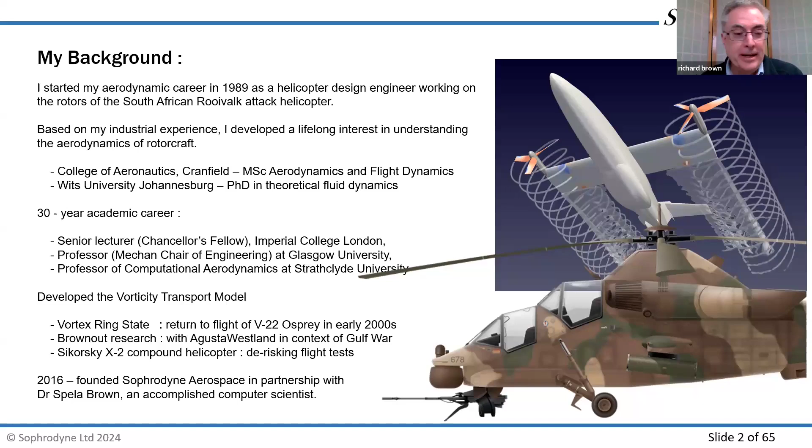Now let's just get down to the basics and get a few definitions under our belt before we get any more complicated. We know that helicopters, tilt rotors, and many other eVTOL aircraft rely on a set of propulsors to generate lift during their descent and landing. That lift is generated by accelerating air downwards through the propulsors. So that pattern of downwards moving air below the vehicle is what we call the downwash field.

And then when that flow hits the ground and turns outwards and is deflected radially out across the ground, we call that field the outwash field. So it's important to get this distinction between downwash and outwash.

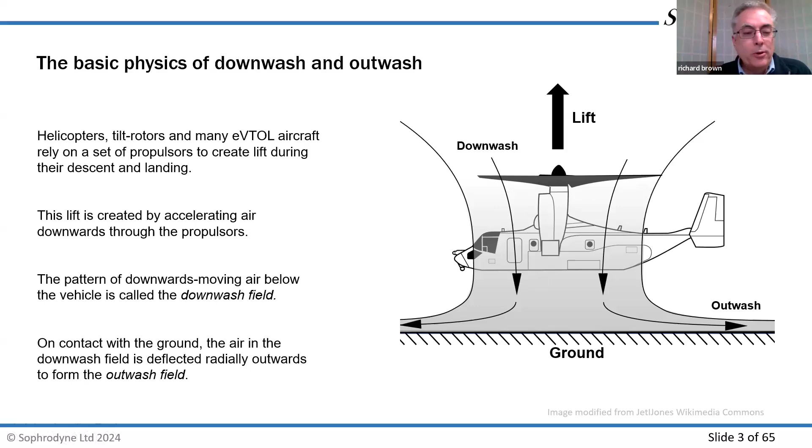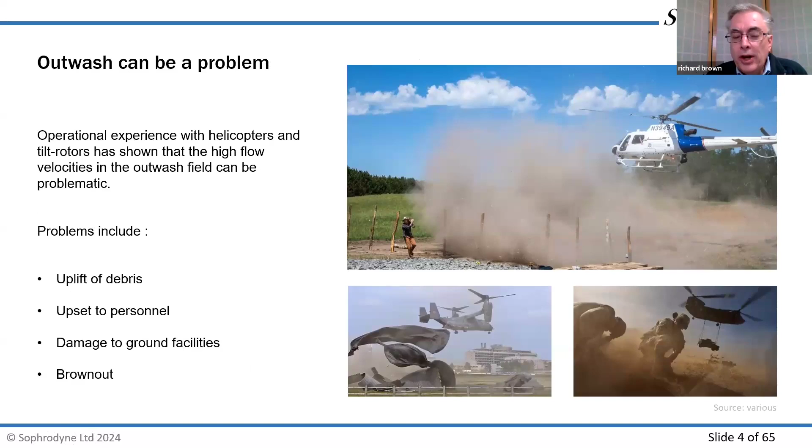Now, we know from our helicopter experience that outwash can be a problem. Various operational problems include uplift of debris, upset to personnel, damage to ground facilities. The root cause of brownout, if you like, is downwash and outwash. And so we're familiar with some of these problems within the helicopter community already.

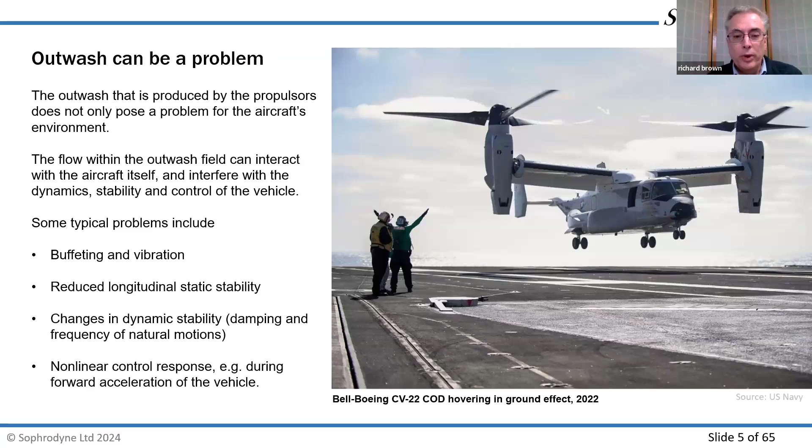We also know that the environment is not necessarily the only part of the system that's afflicted by outwash issues. The aircraft can be influenced by the outwash characteristics of the system as well. So we know there are typical problems such as buffeting and vibration, reduced longitudinal static stability, changes in dynamic stability, all sorts of things like nonlinear control responses, for example, during accelerating the aircraft into forward flight, that are caused on the aircraft by its interaction with the ground and by implication with the outwash field that the aircraft creates.

Okay, so some of the background work to this was work that I did on the vortex ring state in the context of vertiport design. And I'll return to the whole issue of vertiport design later. As you might imagine, the outwash issue is particularly pertinent when we get to that particular frame of reference.

And the work that I presented at the EASA Rotorcraft and VTOL Symposium, which you can find online, was called 'Are eVTOL Aircraft Inherently More Susceptible to the Vortex Ring State Than Conventional Helicopters?' And that's very much what I talked about last time I was invited to talk to the council here.

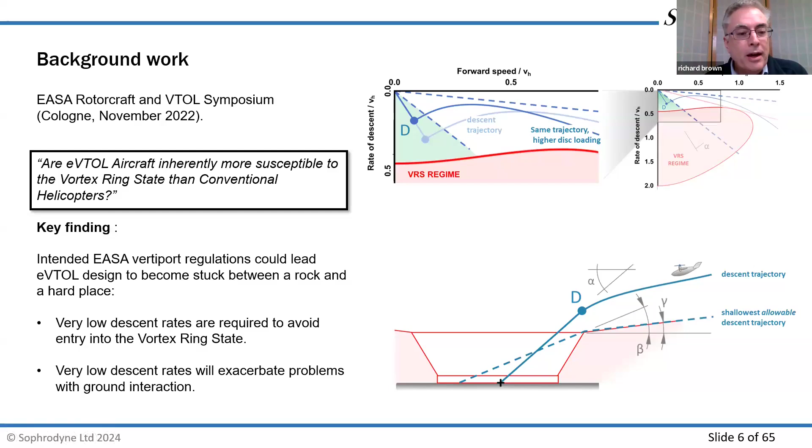Okay, so that led to essentially the focus on the ground interaction, perhaps as an ancillary issue to do with vertiport operations. And I'll talk a bit about that today. So I'll look at the basic physics, I'll look at some of the background to the work that we did, I'll describe in some detail the new study that we performed, and then I'll talk about perhaps the most interesting part, the practical consequences of the findings that we managed to come up with.

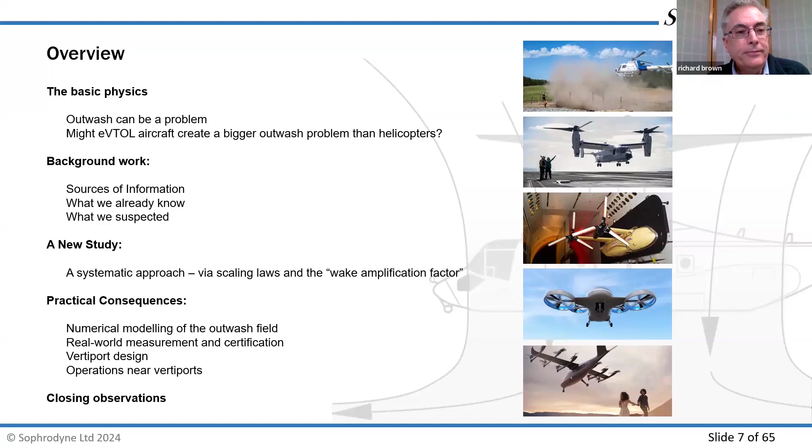So the problem can perhaps be encapsulated in the sense that we know outwash is a problem with helicopters, but might eVTOL aircraft create a bigger outwash problem than helicopters? And we know that the main factor influencing the strength of the downwash field is the disk loading of the propulsors.

Now, this diagram, I think many of you have probably seen before. I presented it earlier, which shows how the downwash velocity is related to the weight of the particular aircraft. And what it does is it tries to contrast the properties of conventional helicopters, shown in blue, with some of the more representative members of the helicopter class shown in yellow, with the characteristics of the eVTOL aircraft for which I could find data. And generally, it's clearly apparent that most current eVTOL aircraft have higher disk loadings than conventional helicopters with the same weight. In other words, the downwash velocities they produce will be expected to be higher than those produced by similar sized helicopters with similar weight.

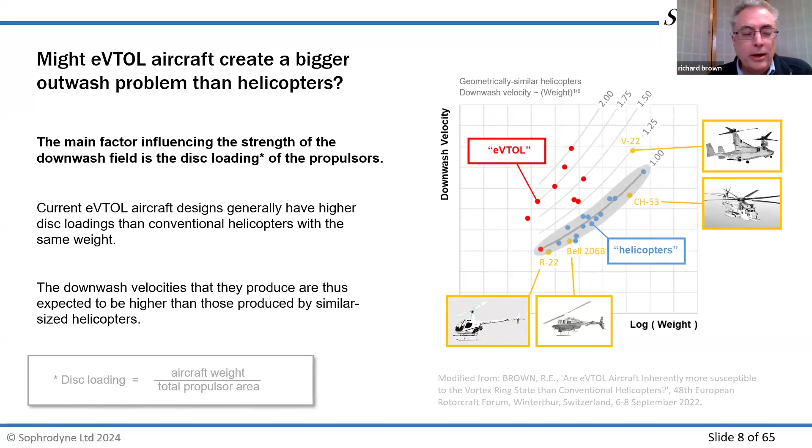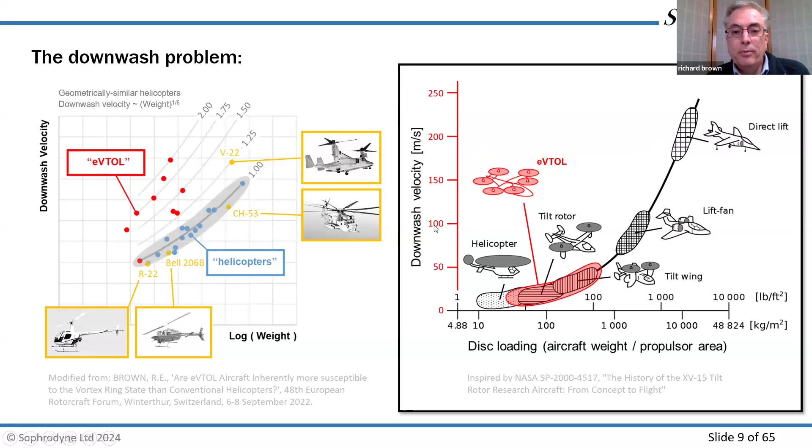So tilt rotors live at the high end of the eVTOL spectrum, and then we have all these jet lift type vehicles or directed thrust vehicles over at the top here. Many of them not in service anymore, but of course they were de rigueur during the 1970s and 80s.

Now, when it comes to the outwash problem, we need to be a little bit more careful, in that the size of the aircraft is critically important. You can imagine two different aircraft that are geometrically similar and are operating under geometrically similar flight conditions. So, for example, at the same ratio of the height above the ground to their characteristic dimension, if they have the same disk loading, those vehicles will have the same downwash velocity. But we wouldn't expect their outwash characteristics at the same distance away from the system to be the same. So in other words, there is a scaling issue here. There's an idea that the size of the aircraft actually makes a difference. So don't be too naive in terms of this idea that a high disk loading is inherently the only factor that controls the strength of the outwash.

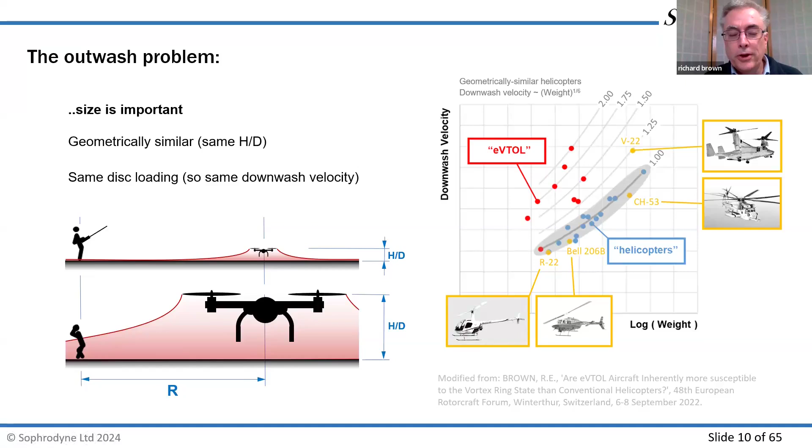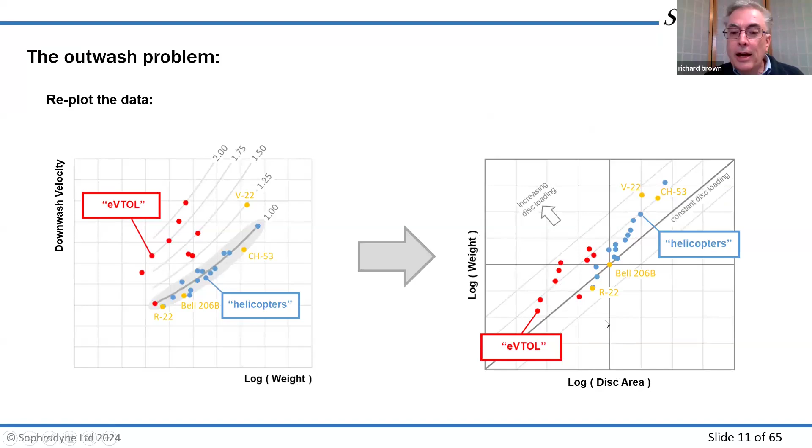And in fact, the best thing to do is to take this diagram on the left here with the downwash velocity expressed in terms of the weight of the aircraft, and to re-express all that information on a slightly more complex graph where we have disk area on the horizontal axis, weight on the vertical axis, and lines of constant downwash velocity are actually diagonal across that diagram if plotted on a log scale. And then we can see that diagram evolve into a slightly more interesting state, in that we can perhaps partition the eVTOL aircraft into separate classes. These guys down here in Group A are very small and very light, and so they are probably not a risk as far as their outwash is concerned. These guys are heavy and small, and hence we don't really know how they're going to behave.

We need to do further investigation. But perhaps the aircraft that are of most concern are these that are up here, which are roughly as heavy as conventional small helicopters, or even fairly large helicopters sitting here above the Bell 206B.

But they're a risk in terms of both their weight and their size as a result. So whichever aircraft you happen to be flying, it might fit into one of those classes there, and we need to be a little bit careful about which one we're actually considering.

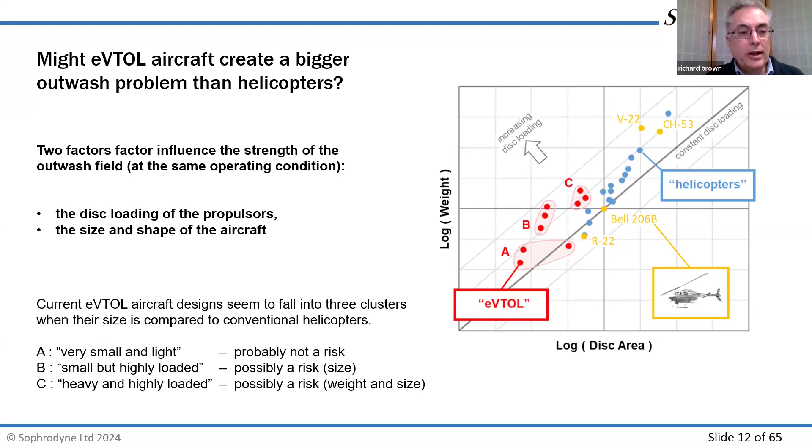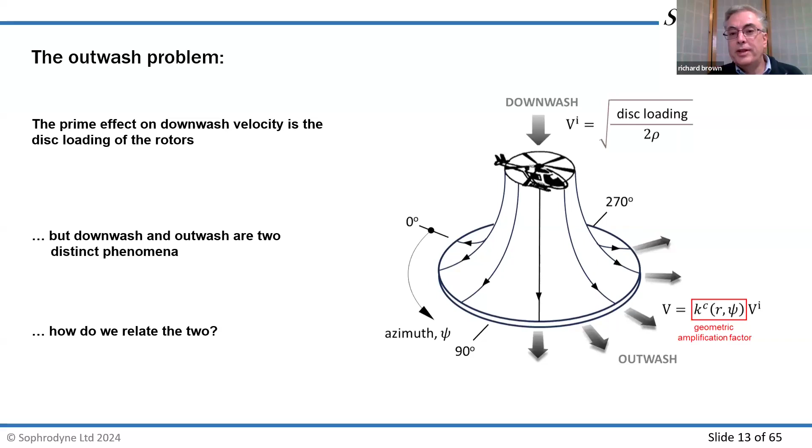Now, given that downwash and outwash are two distinct phenomena, how do we actually relate the two? This diagram tries to encapsulate this. We have the downwash, which comes through the rotors, hits the ground, spreads out and turns into an outwash. But how do we actually relate the downwash to the outwash, and hence the outwash to the disk loading of the system? I'll talk about that in detail in the next few slides.

A lot of the information that I'm going to present from here on is encapsulated in this new study, which was completed under UK Civil Aviation Authority and is now published and available on the web as CAP 2576. This study was really intended as a first step towards understanding the issues more broadly. I think that's worth keeping in mind. It was a stab in the dark, if you like, an attempt to add some more information into the mix, but certainly it wasn't seen as the last word on the subject.

It was really there to try to engender a bit of discussion and a bit of a to and fro as to how important this issue really would be for eVTOL aircraft as we currently understand them. What the study does is it integrates existing knowledge into a consistent framework that we hope can help predict and explain the effects of outwash and downwash that might be associated with current and future eVTOL designs.

And then we try and take that knowledge and extend it a little bit by producing new numerical data, which reveals the salient flow physics. And then what we do is we try to extend our understanding by applying this new knowledge to a range of eVTOL-like configurations. You'll see just how generic these particular configurations are in a minute.

The intent was not to reproduce a Joby or a Vertical or a Volocopter. It was really to be as generic as we possibly could, and as careful in comparing these different configurations as we possibly could be, so that we'd end up with some sort of basic physical and scientific understanding, which we could extend more broadly across the range of eVTOL aircraft.

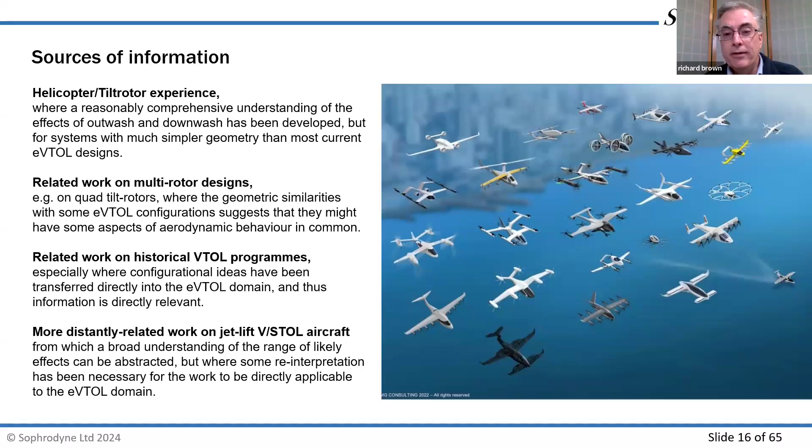Sources of information - well, it's amazing how much information is actually out there. There's helicopter and tilt rotor experience. There's related work on multi-rotor designs. There's historical VTOL programs where the information can be almost ported directly into the new eVTOL domain. And then there's a whole load of information done in the context of jet lift, largely by NASA in the 1950s, 1960s, and 1970s in support of various programs, which is readily accessible.

Now, what do we already know? It's perhaps worth actually thinking about that. The whole industry of outwash and downwash is dominated by a very influential FAA Department of Transport study that dates from the early 1990s. The work originated with that of Ferguson, but then Preston and co-workers extended that.

And what they basically did is they thought of the downwash as this flow through the rotor, which would then turn into a jet-like flow, a thin jet-like flow out across the ground. This idea has very much informed how people tend to think about the outwash field in current circumstances. So the flow has this jet-like nature, on top of which perhaps there are certain perturbations, and that's essentially it - it's a very orderly picture of what actually goes on within the flow.

And as the flow moves out across the ground plane, it effectively decreases in intensity. The velocities get smaller and smaller, and perhaps the fluctuations on top of that mean flow get smaller and smaller as well. And eventually the flow dissipates into the far field.

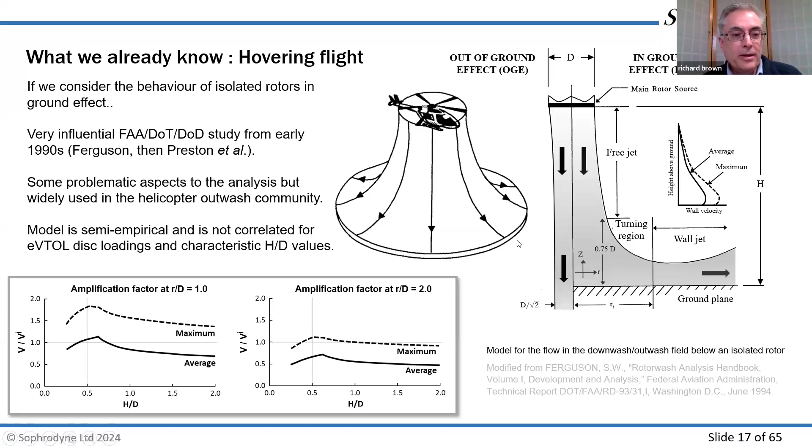This is an issue that the helicopter world has had to contend with to some extent. For example, if you're a CH-47 pilot, you'll know about jet-like flows outwards along the periphery of the outwash field, but it's not something that's particularly well within the lexicon of standard helicopter type analysis.

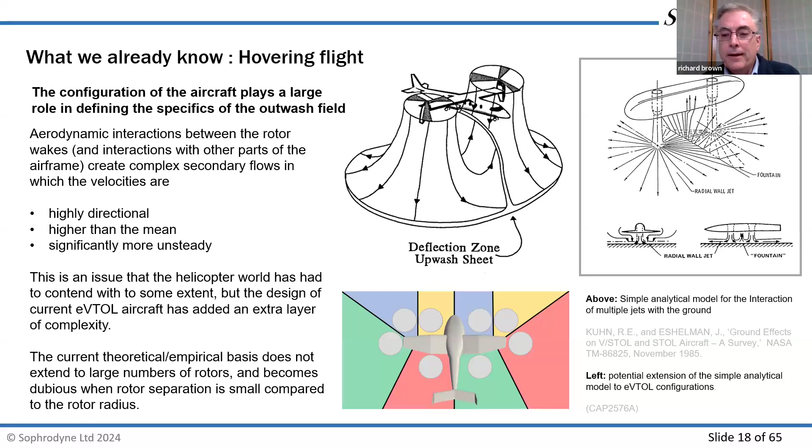Okay, so we want to extend beyond this level of understanding. And what we expected is that if we ended up with multi-rotor configurations typical of eVTOL aircraft, you might end up with very non-uniform flow fields of very high magnitude along certain parts of the azimuth with respect to the vehicle, if you have a multi-rotor configuration operating at low altitude above the ground.

That was effectively the position that was taken. And the way that we would encapsulate that particular variation is we would say, okay, that's the velocity out across the ground, that's the induced flow through the rotor, and perhaps you'd have to define this function, which we'd call an amplification factor, which is a function both of radius and azimuthal position around the vehicle.

And these two examples here, this is a quad rotor compared to a conventional helicopter. Here you can see there's not much variation of the velocity around the azimuth, but here you can see that there are very certainly certain directions along which the outflow is concentrated.

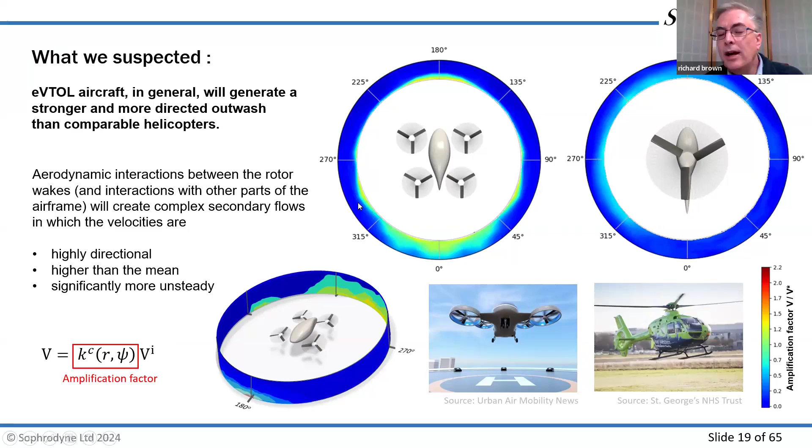Okay, if we went to forward flight, then we know that things get really, really interesting. The structure of the outwash field produced by a single rotor helicopter depends, of course, on the height above the ground at which the aircraft happens to be flying, but also its airspeed and the strength of prevailing winds, with this very interesting physics that the flow can actually change modes depending on the speed at which you're traversing with respect to the air.

And so in transition to forward flight, you might encounter the flow changing geometrically through a variety of patterns. The one of most interest to us is this highly recirculatory flow regime, which develops into this idea of a ground vortex as you pick up speed across the ground. So this idea of several modes.

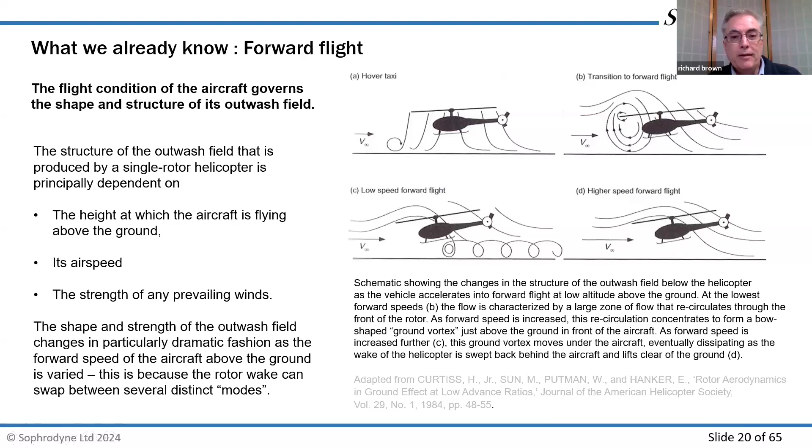And the modes you can actually encapsulate in a diagram like this, which I call the Curtiss diagram in honor of Howard Curtiss, who first came up with it, where essentially as a function of forward speed on the horizontal axis and rotor height, you'd be able to pick up the flow in these various flow modes.

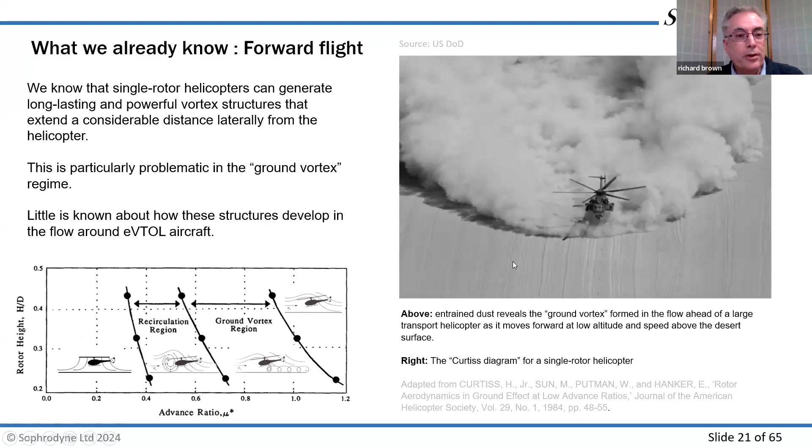And here's quite a beautiful picture of a CH-53 flying at low altitude across the desert. You can see this beautiful bow-shaped ground vortex existing in the flow just upwind of the vehicle in those conditions. Now, what happens when you take this helicopter type information and transplant it into the multi-rotor field?

Well, what we expected and what we found is that eVTOL aircraft with their multiple rotors in general have a much larger footprint on the ground than comparable helicopters. And this is again a consequence of the aerodynamic interactions between the rotor wakes.

So in this quad-rotor vehicle here, you can see these almost like twin bow vortices, which interact to create a very broad structure upwind of the aircraft as it moves along the ground. And another interesting thing here is, of course, the amount of turbulent structures that tend to interfere with the tail structures, the empennage of that particular aircraft. I'll perhaps get around to talking about that in a little bit more detail.

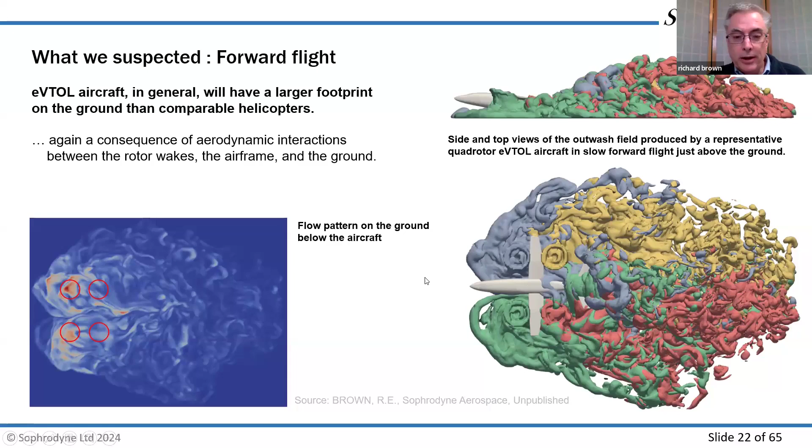Okay, so how much stronger will the outwash in fact be compared to a helicopter with the same weight? Well, this is the kind of analysis that we would do. We would take the helicopter outwash velocity, amplify that by a disk loading effect, so just accommodate the difference in disk loading between your typical helicopter and your eVTOL aircraft, and then try to analyze this configurational effect, which comes into play because of the eVTOL aircraft having multiple rotors juxtaposed in a particular arrangement around the aircraft.

And if you could come up with these two correction terms, then perhaps you could relate the velocities in the outwash created by an eVTOL aircraft to the velocities created by a helicopter under the same circumstances.

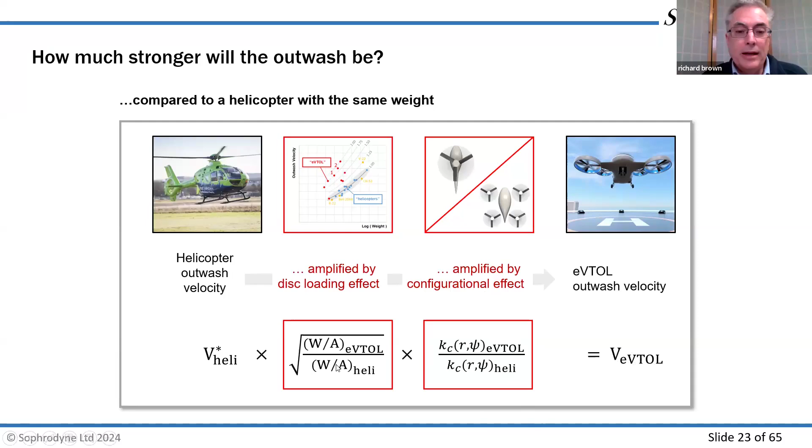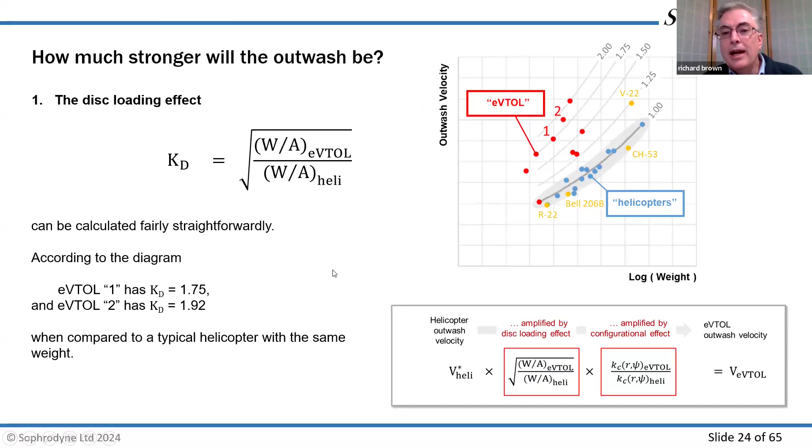The disk loading effect is pretty straightforward. All you do is divide the disk loading given by one aircraft configuration by that given by another. Typical values would be between 1 and 2 for comparing classic eVTOL aircraft to normal helicopters. This configurational parameter is the more difficult one to determine, and that's where the study actually focused itself.

When you try to compare two aircraft with different configurations, you need to be really careful that you're comparing apples with apples. So we need a design taxonomy that actually makes sense from an aerodynamic point of view. We need to enforce a whole bunch of scaling laws to make sure that when we're comparing the characteristics of the eVTOL aircraft to a helicopter, we're not comparing apples with pears.

So what we did throughout the studies is devise a set of configurations, a taxonomy if you like, or a hierarchy of vehicles, where one would be a permutation of the next, but in a very systematic way. In devising these permutations, we made sure that certain parameters were kept constant throughout.

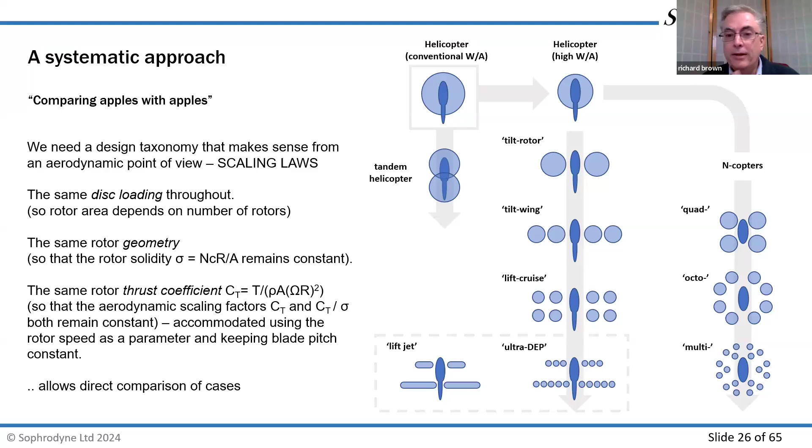Most importantly, the disk loading. In other words, the individual rotor area depends on the number of rotors. We would keep the rotor geometry the same so that the rotor solidity would remain the same, and we would keep all the rotors operating at the same thrust coefficient. If we keep these three parameters constant, then we can be sure that we can compare cases with each other.

We can do various parametric changes. For example, we can explore the effect of changing the rotor geometry. We can go from, let's say, a basic lift cruise configuration, and we can break the symmetries by moving the rotors outwards, as in the second example, or we can do even more damage to the symmetry of the system by moving various rotors about, as suggested in the diagram at the bottom.

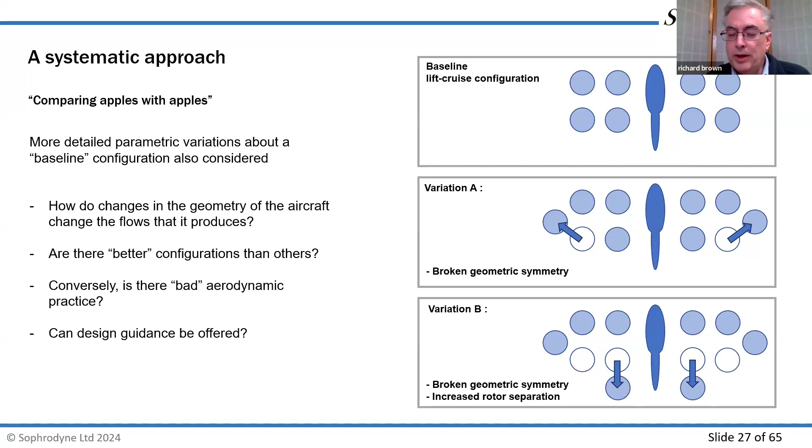The idea there was, can we actually pick up the effect of these changes of geometry in the pattern of outwash on the ground? Are there better configurations than others, for example, that produce less outwash? Is there bad aerodynamic practice? Is putting rotors in certain positions on the aircraft not such a great idea compared to other potential configurations that might be adopted? And can we actually offer design guidance eventually to the designers of these sorts of vehicles?

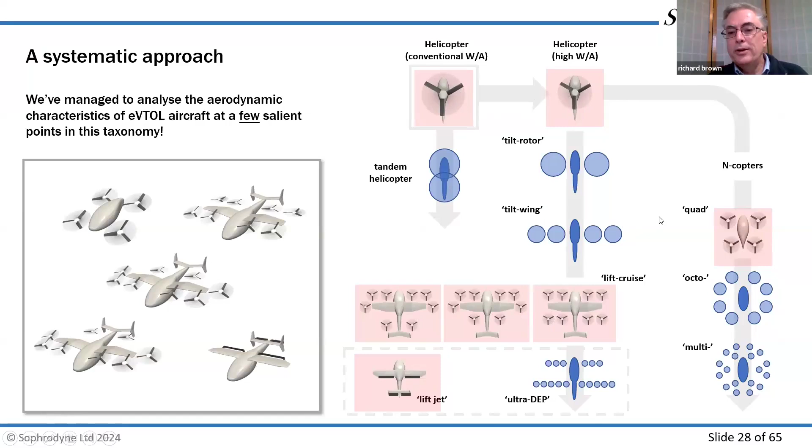So we managed to get through, in the course of the project, a few configurations, but certainly not a comprehensive range of them. We analyzed a few conventional helicopters, this one with a conventional disk loading, this one with a slightly unrealistic disk loading that's more representative of eVTOL aircraft. We looked at a range of lift cruise designs, a lift jet design, and also a more conventional quad rotor design in trying to compare the various characteristics of these vehicles.

Now, how we did this is we went through the whole process using high resolution numerical models. So the basis of the results I'm going to show you here is essentially numeric. What we did is use a very specific numerical tool called the Vorticity Transport method. The difference between that method and other more conventional CFD techniques is it actually preserves the inherent structure of the flow. This turns out to be really important when we're trying to find out what the characteristics of the outwash happen to be.

A typical RANS CFD method would diffuse all this structure and leave you with a very bland outwash field, created across the ground, where you wouldn't actually be encapsulating some of the fundamental physics that we found really drives some of the important salient features of the outwash field.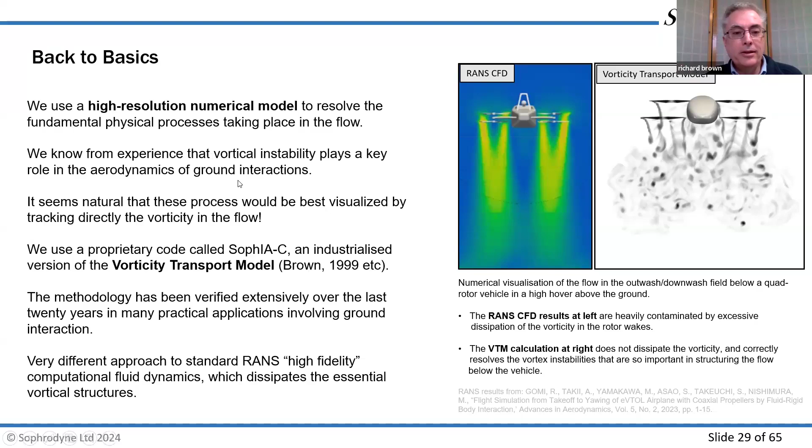So remember that what we're doing here is looking at a very specialized numerical method, which is optimized for the analysis of rotor flows with vortices, where, of course, there are these inherent instabilities that are really important to evolving the flow. So typically, this is what a calculation would look like.

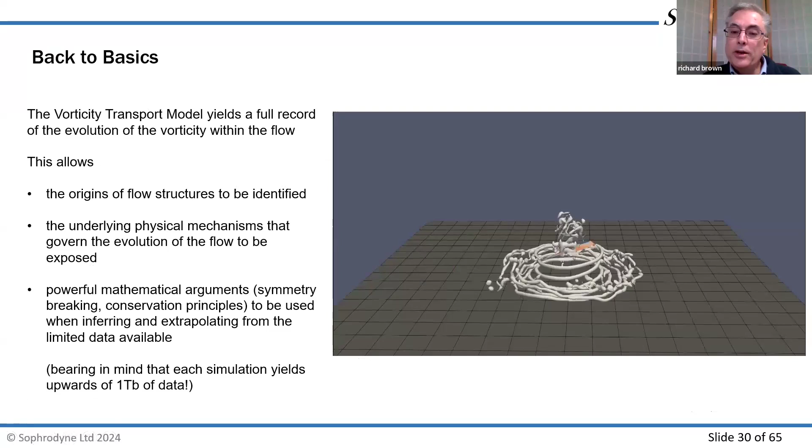That's a very simple calculation of a two-bladed rotor, but you can see that we're actually capturing the tip vortices. We're capturing the interaction of the tip vortices as they roll up and destabilize themselves, and then their interaction with the ground as they spread out across it. You can see how the flow actually starts to develop, but the flow has a finite range of dispersion out across the ground because of these inherent vortical instabilities within the flow.

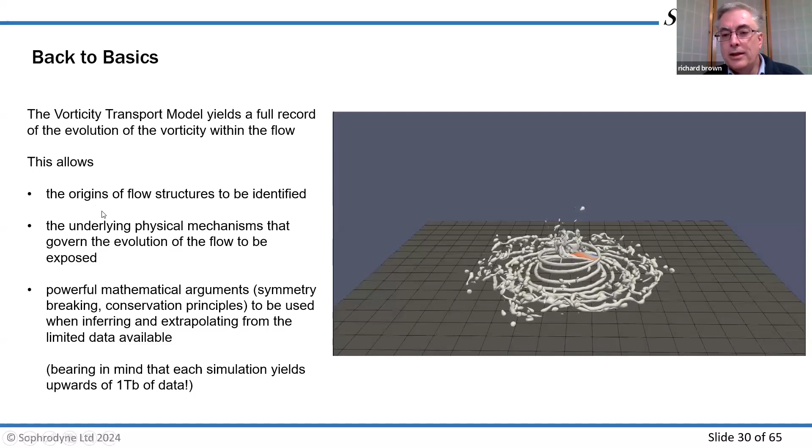Okay, so we can identify the origins of flow structures using this high-powered CFD technique to analyze the flows of these sorts of systems. And that's typically what a developed outwash flow will look like. Here's the rotor, here are the tip vortices. They interact with the ground and start to disperse, break up and destabilize themselves as they move out across the ground, giving some very interesting flow patterns. You can see how different that is from this classical conception of how the outwash flow looks.

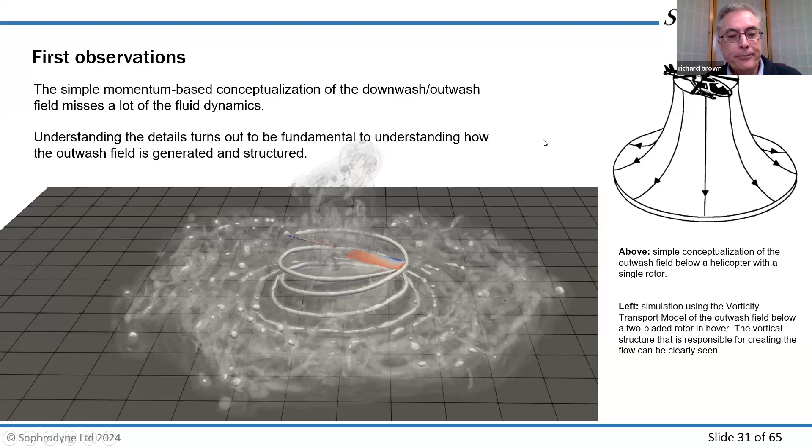So the first thing, of course, is to validate these models by comparing against experimental data. And we managed to do that fairly successfully. This is small-scale information from wind tunnel tests, where you can pick up the positions of the vortices fairly well. This is a comparison against full-scale data for the CH53, and we can actually pick up the variation of outwash velocity with distance above the ground fairly well, in terms of both its magnitude and its character.

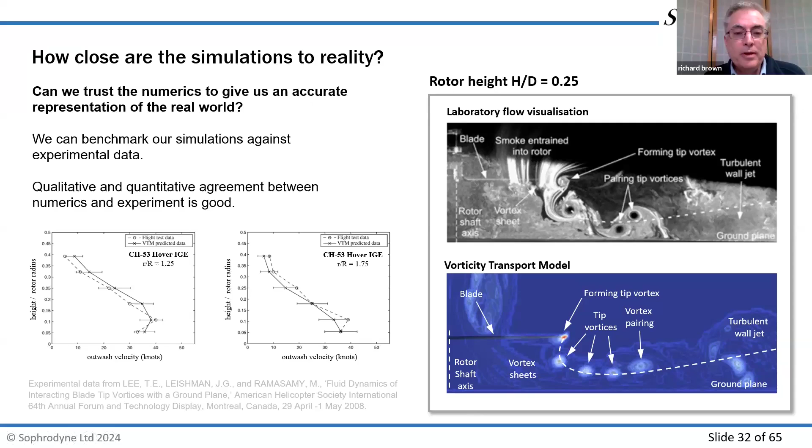Now let's get back to this idea, the simple conceptualization of the flow - that the flow in the wake tube accelerates down below the system. Unfortunately, this is the characterization that is preserved, or supported, by many RANS calculations. So you need to be a little bit careful about what you read in the literature. The flow is not actually like that.

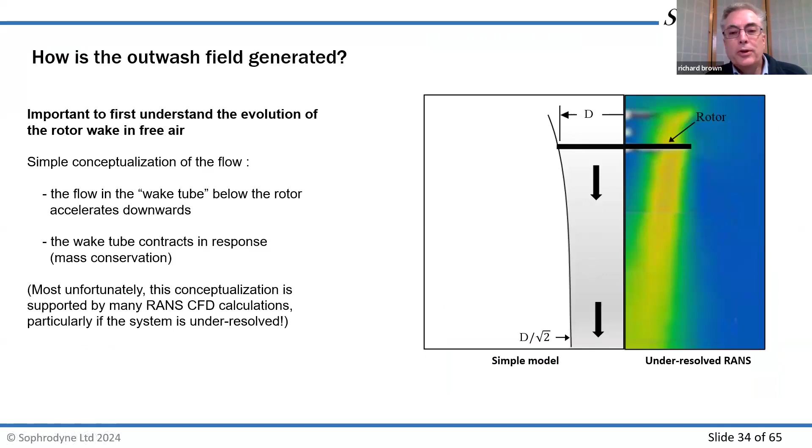We know that the flow is much more granular. It consists of these tip vortices, and these tip vortices eventually destabilize. Then the structure below the rotor wake actually dissipates, turning into this turbulent mush of fragments. That's very, very different to this coherent tube of flow which extends out to infinity below the rotor system.

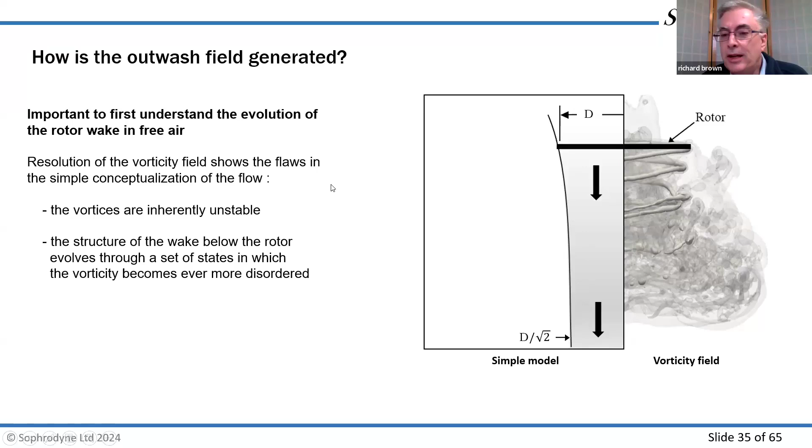The vortices are inherently unstable. What that does is mean that our conceptualization of what the rotor wake does should change in light of this instability. So the wake consists of a portion which is initially coherent. That coherence disappears as the wake is destabilized by these inherent instabilities. The wake eventually ends up in a disordered state, and then decays into a turbulent jet which extends out to some distance below the rotor system.

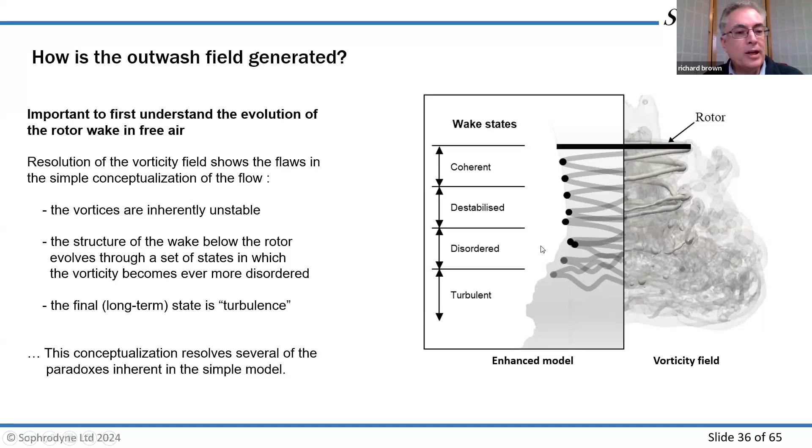This conceptualization actually resolves several of the paradoxes inherent in the simple model for the outwash that folk are perhaps more familiar with. So how's the outwash field generated? Well, all I do is take this particular picture of the helicopter rotor, or the eVTOL rotor, in free flight out of ground effect, and I stick in a ground plane.

Now, the kind of outwash flow I'm going to get, given what I've described in terms of the changing structure with distance below the rotor, changes depending on how high the rotor system is above the ground. So if the height of the rotor system is roughly equal to its diameter or somewhat higher, I'm going to end up with a turbulent outflow across the ground. But if I bring that distance closer, the interaction with the ground becomes ever more structured.

So here, in this case, I have a short distance over which these vortices actually remain coherent - a region where we might call the ground interaction intermittent, before you end up with this turbulent outflow. And if the rotors are really, really close to the ground, then you end up with a highly structured interaction with the ground. I'll show you how that applies to different aircraft in a second.

If you start to stick multiple rotors next to each other, you can imagine again the form of interaction depends on how high those rotors are above the ground. So for a highly mounted pair of rotors, the interaction becomes turbulent, whereas if we bring the rotors way down close to the ground, that interaction becomes far more structured.

And you can end up with really interesting permutations of that. For example, if you've got one rotor which is very close to the ground and one rotor which is really high, then you can end up with these sort of undercutting type features, where the wake from the low rotor manages to tunnel its way under the wake from the high rotor, and you end up with some very, very complex vortical structures, which I'll show you in a second.

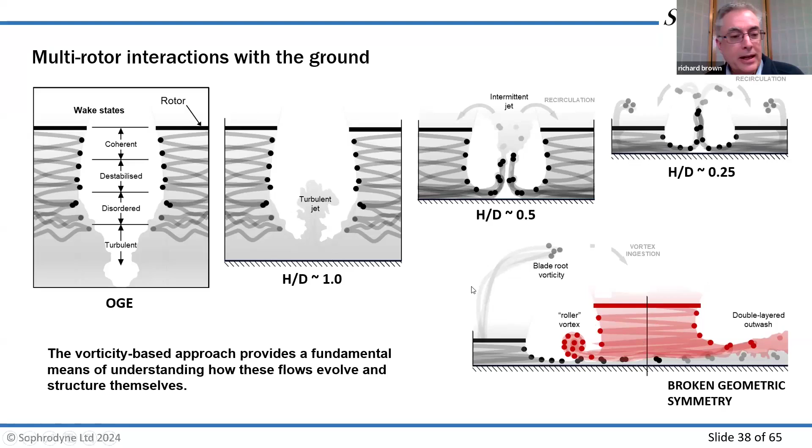Okay, so the aim is eventually to get to design guidance. You can see, for example, how the configuration of the aircraft might actually influence the structure of the outwash field. An aircraft with low, large rotors might end up with a very different outwash pattern to one generated by an aircraft which has higher mounted, smaller rotors when operating at the same height above the ground.

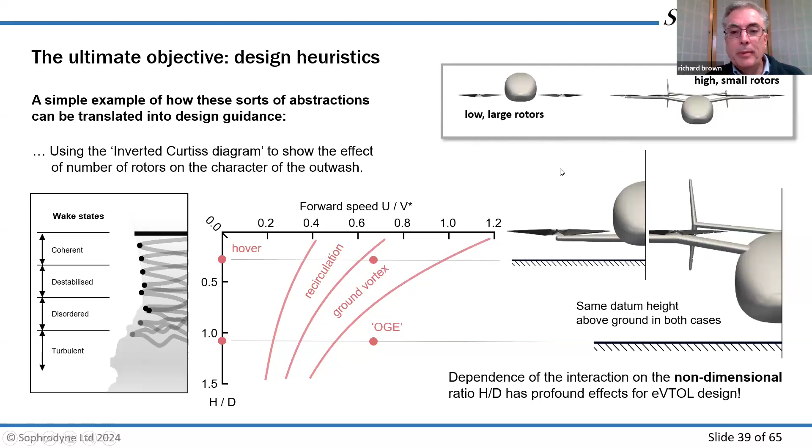Perhaps the best thing to do is to show you some animations of what goes on in that particular case. Using this numerical method, we can do a numerical simulation of the outwash from under an aircraft where we've defined the configuration, and we can then pick up the various salient features to understand just what's going on in the outwash field.

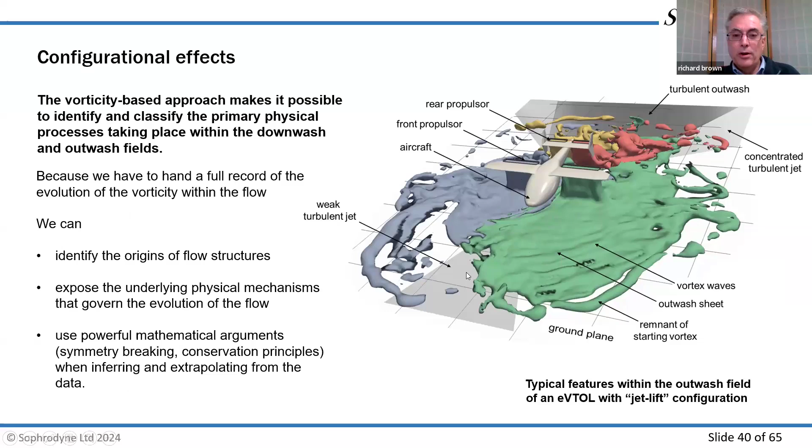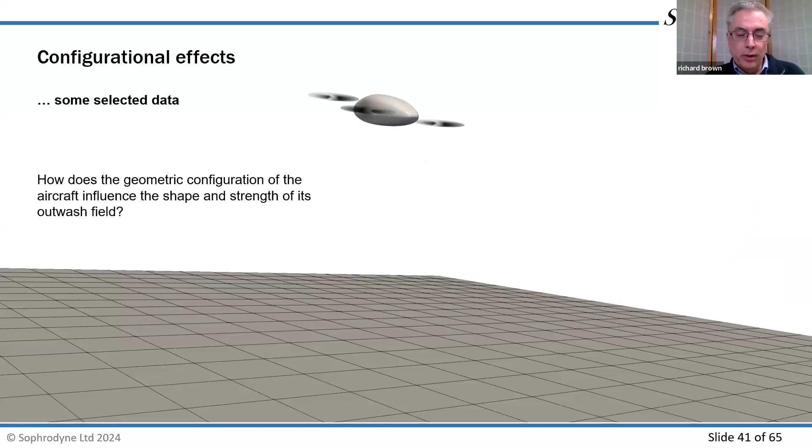Okay, so how does the geometric configuration of the aircraft influence the shape and strength of its outwash field? That's really the question we're trying to answer in establishing the equivalence between helicopters and eVTOL aircraft. So let's have a look at a few particular examples.

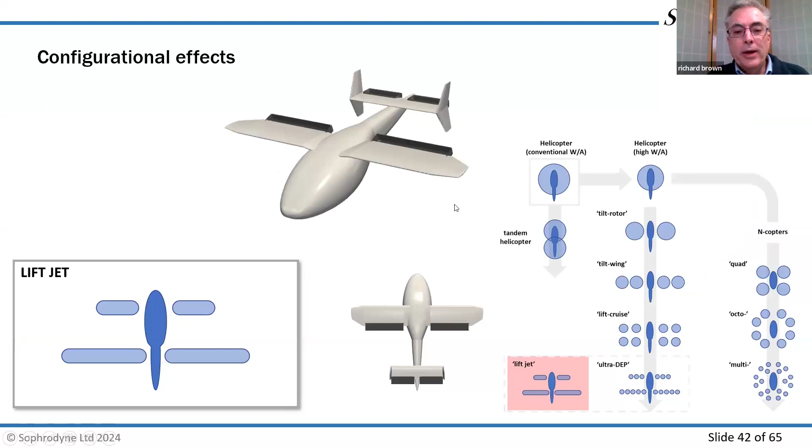This is a jet lift aircraft where we've got these long slot-like effectors mounted around the aircraft. What kind of outwash field it produces is shown in this particular video. You can see the outwash from the various effectors colored in different colors. We're looking at the vorticity field here, and you can see how that vorticity field spreads out across the ground.

The character of the flow in front of the aircraft is very different to that behind. You can see the flow behind the vehicle is highly turbulent and granular, whereas the flow out in front of the vehicle is fairly smooth and sheet-like.

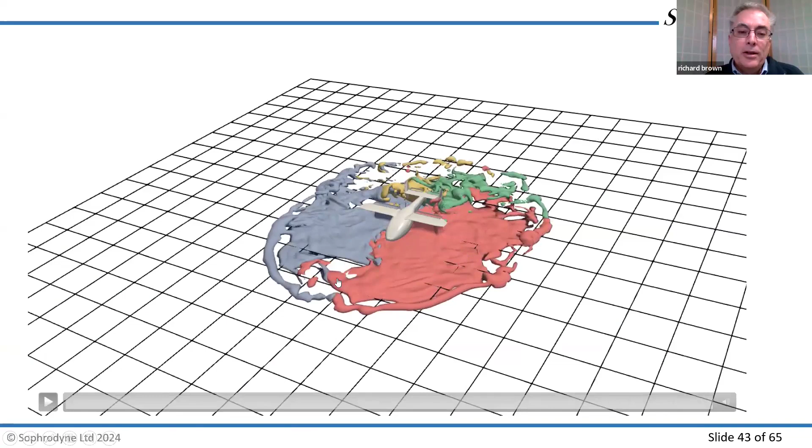Something very interesting is going on along this axis over here. Essentially, what's happening at this interaction is you're ending up with a high-velocity jet-like flow out along the axis of the aircraft. But bear that in mind, and let's change the configuration.

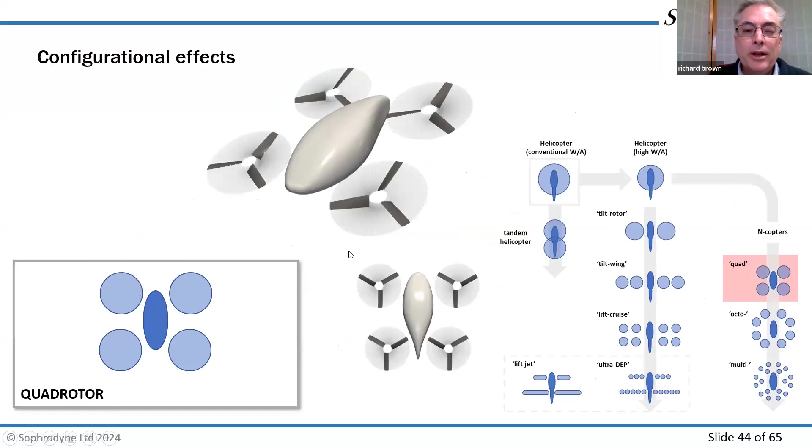Let's go to something that's more akin to a quadcopter and see what kind of outwash that produces. If I run that same video here, you can see we end up with a situation that's really interesting, where there's a lot of interaction between the rotors. These rotors produce flow fields, bits of vorticity, which tend to be sucked into the other rotors.

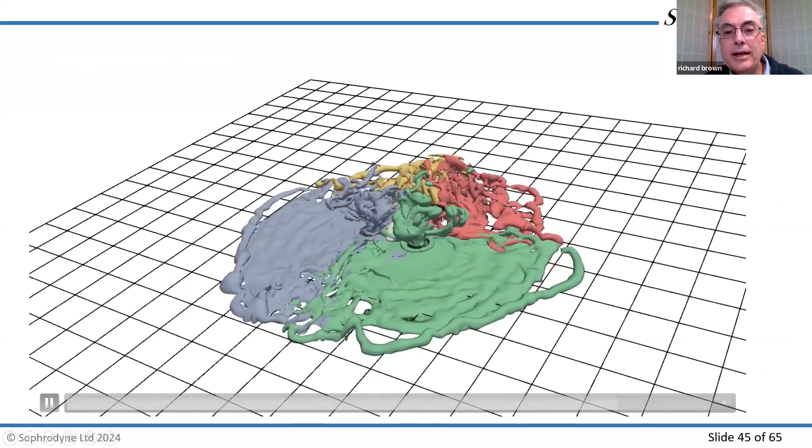You can see again we've got this idea of a sheet-like flow out in front of the system and a much more turbulent flow behind, because in this case these rear rotors were actually mounted higher above the ground than the rotors in the front of the aircraft.

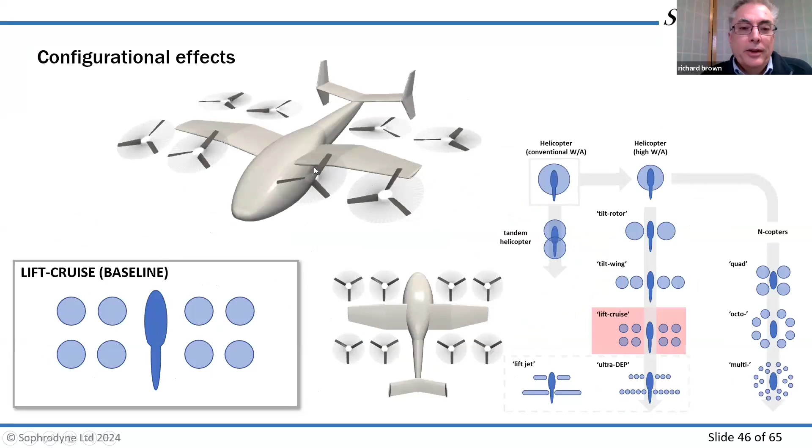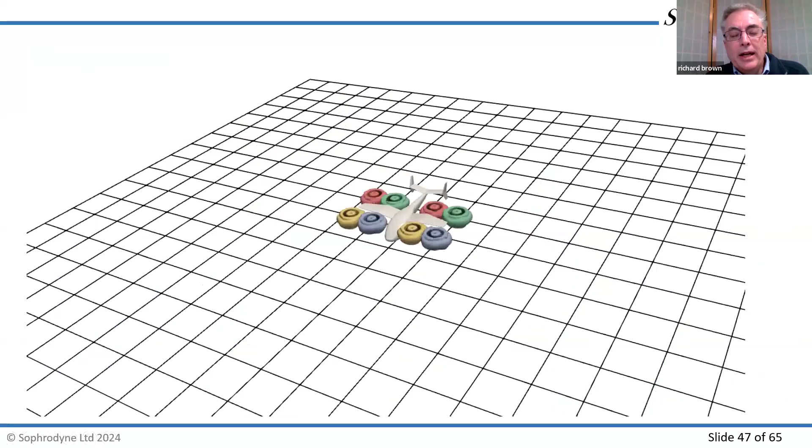If we change to something which is a little bit more representative of conventional, the sort of configuration very characteristic of a lot of the aircraft that we currently see on the design boards, the character of the flow changes completely. Here we have an 8-rotor lift cruise configuration, and if I run its calculation, you can see the aircraft very quickly becomes enveloped in a highly turbulent outwash field, which is largely a result of the rotors being much smaller and mounted higher above the ground.

Okay, so cutting to the chase, how do we take that information? Well, the first thing we can do is try to understand what the physical mechanisms involved actually are. The interesting thing is, because the calculations are unsteady, they run from an initial condition and advance through time for as long as you'd like, so you can actually pick up the evolution of the flow structures in terms of these inherent instabilities within the rotor wake.

Okay, you start to see the effects that you'd expect. If you change the height of the aircraft above the ground, in this case the lift cruise aircraft, you can see for low altitudes above the ground you might end up with a coherent, very sheet-like outwash field. But as you increase the altitude above the ground, that outwash field turns into a much more turbulent interaction with the surface underneath.

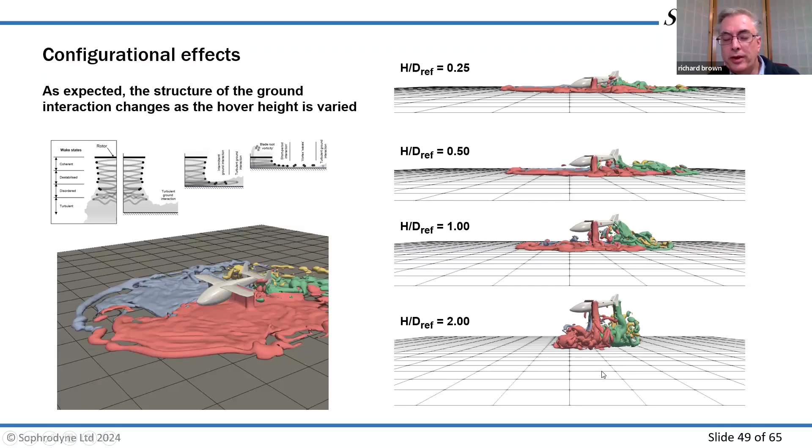Likewise, if you change the forward velocity of the aircraft, you expect to see the Curtiss diagram type effects. In this case, this is the quadcopter, and you can see the aircraft is almost enveloped inside its recirculation zone. As we speed up the aircraft, a ground vortex forms, and as we go ever faster, that ground vortex gets swept into the flow behind the aircraft. This is much more prevalent or easily observable in the case of the lift cruise, where the propulsors are higher above the ground.

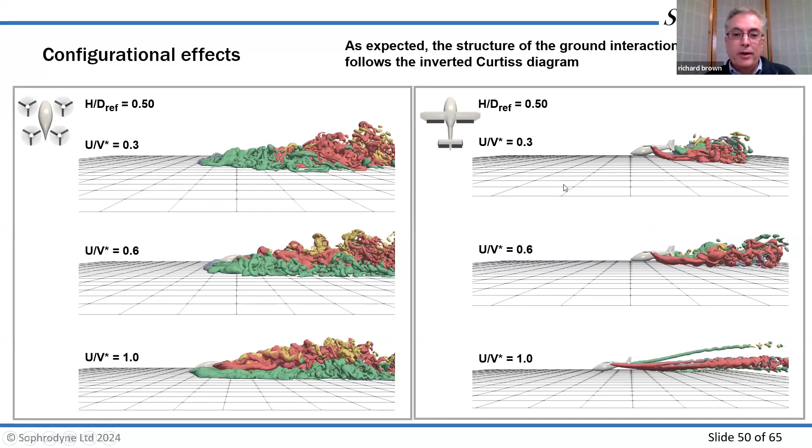This figure is perhaps one of the most important ones that I'll show you, because a lot of the data for the velocity in the outwash field in the current literature is presented as a mean outwash value plus a superimposed perturbation - this idea of an outwards flowing jet of air across the ground. If you have a look at this simulation of what the instantaneous velocity on the ground actually looks like below an aircraft like this, it's very hard to imagine that there is this coherent jet of air across the ground upon which we can superimpose small fluctuations.

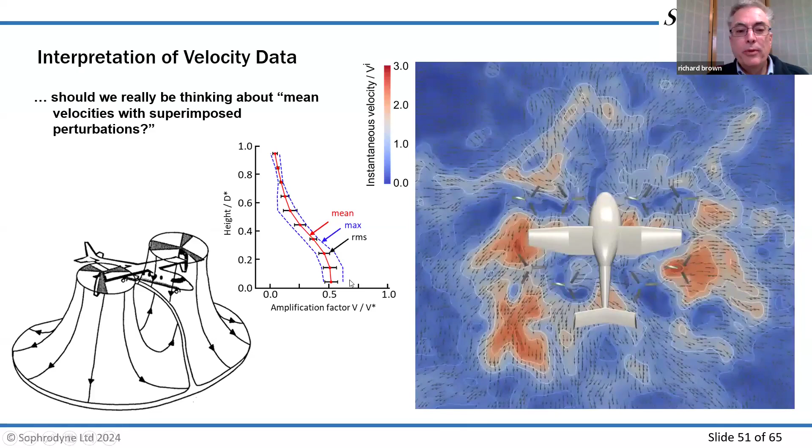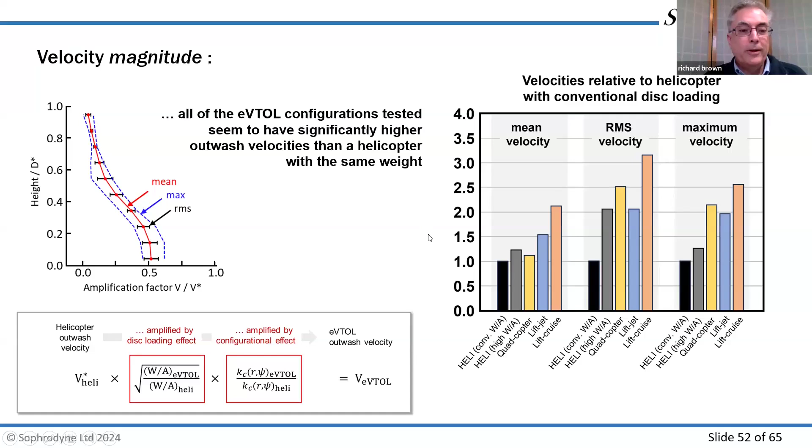Let's have a look in more detail at the structure of the outwash field, and this is where things get really interesting, in that the velocity distribution produced by these various eVTOL configurations is very different. If we look at the mean flow in the outwash, you can see for the quadcopter design, most of the outwash is concentrated in a jet which is actually aligned with the vehicle's fuselage, and that's largely a result of the interaction of the rotors with the fuselage.

If we look at the lift cruise configuration, we tend to find that the mean outwash is more laterally directed as a result of the squeezing of the flow between the fore and aft rotors in this particular case. If we have a look at the RMS velocities, we can see that they are concentrated in these very distinct jet-like structures at particular orientations with respect to the aircraft, and those orientations are generally aligned with the confluence between the individual wakes produced by the rotors.

Now, in my opinion, it's these jet-like structures which are perhaps the most interesting features of the outwash produced by eVTOL aircraft, because those will have the most consequence for operations near vertiports and for passengers and infrastructure that happens to be close by to the vehicle during its operations.

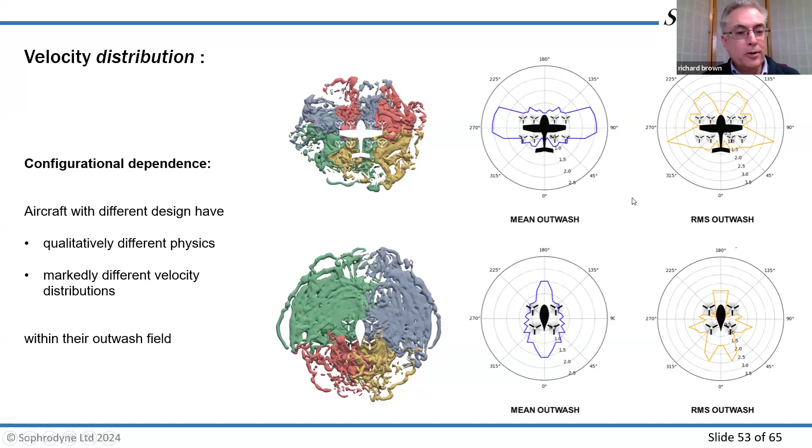The other interesting thing is if we change the configuration ever so slightly, we can make some very big changes to where these jets actually exist and how many of those jets there actually are. So these diagrams compare our very symmetric lift cruise configuration with one where we've moved the rotors around the configuration a little bit to try to optimize some of the aerodynamic interactions. You can see that the jet positions change quite considerably in terms of where they are around the azimuth of the vehicle.

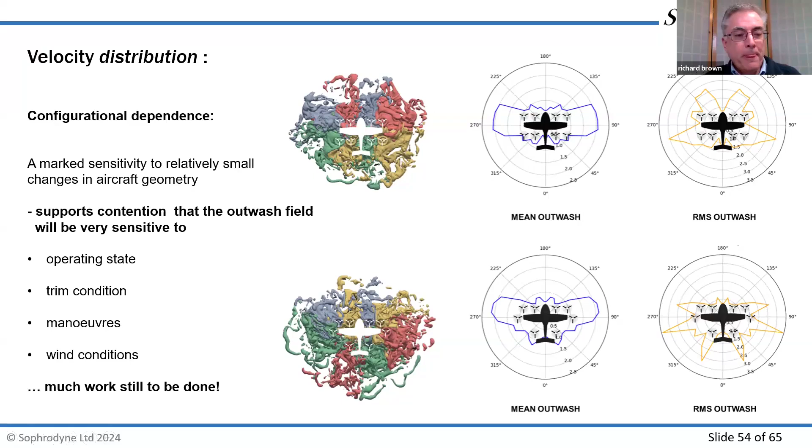Okay, so what does this all mean practically? Let me try and summarize in a few slides as to where this is all going.

What we now know from these simulations, or what we very strongly suspect, is that eVTOL aircraft in general will generate a stronger outwash than comparable helicopters, but also a far more directed outwash in terms of the existence of axes along which the flow will be very strong. Whereas with a conventional helicopter, you expect the outwash to be more or less consistently a certain value, no matter what azimuth you happen to be approaching the aircraft by.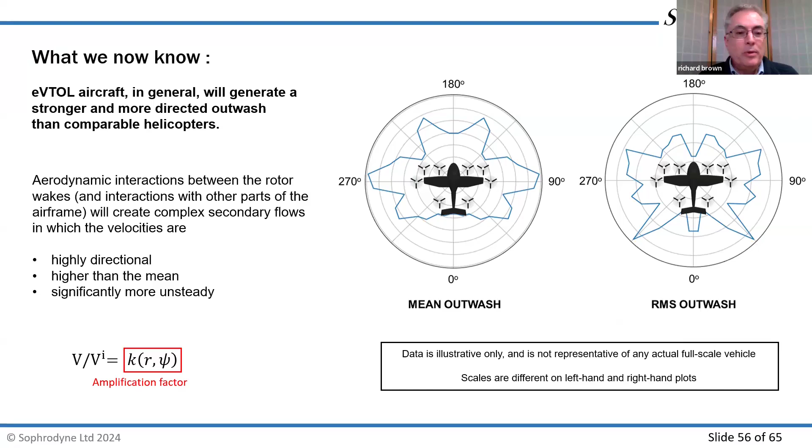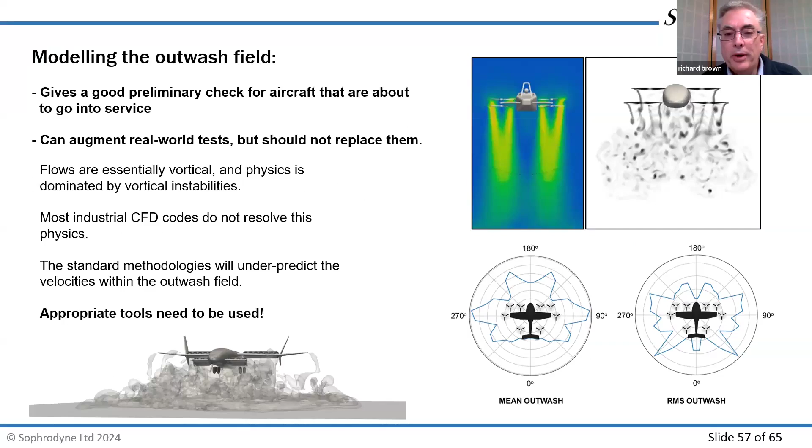So what is that really going to mean? I'll skip over the slide to a large extent. The first thing to point out is that you need to use the right numerical methods to pick up these flow features. If you use a conventional RANS flow, you tend not to pick up these jet-like features, because the basic physical mechanism that produces these jets is the interaction between the vortices on the ground. Most conventional CFD codes don't resolve the flow to that extent to be able to pick up these jets. So using the appropriate tools is perhaps the first recommendation I would make.

When we come to vertiport design, we know that the current way of dimensioning vertiports is in terms of the controlling dimension D of the aircraft, which is just a geometric characterization of the size of the vehicle. The argument here is that it's a good approach to start off with, but if there's aerodynamic interaction involved, then that controlling dimension, based simply on the geometry of the aircraft, is insufficient. It acknowledges aircraft size, but it doesn't acknowledge the aircraft's configuration itself. So it ignores issues of disk loading, and it ignores the directionality of the outwash.

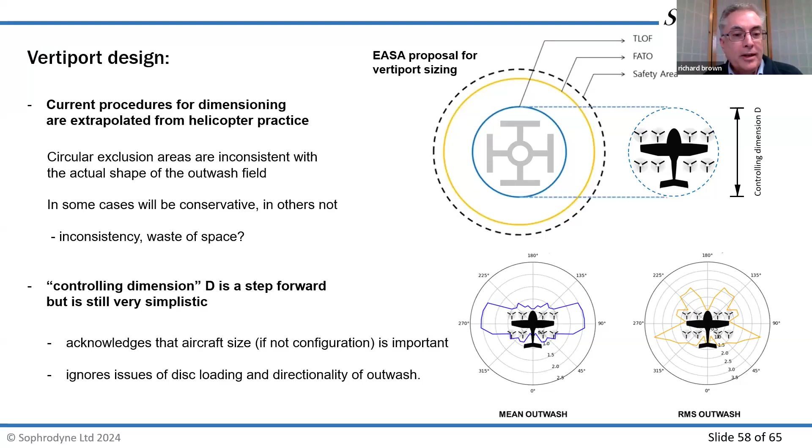If we're going to use these sorts of principles, which are largely developed in the context of protecting the aircraft from its surroundings, there's a tendency within the vertiport design community to extrapolate this kind of analysis and use it to try to determine the zone of influence or the zone of danger posed by aircraft on the surroundings. Then we need to be very careful in using this controlling dimension analysis.

Another thing to realize is that the orientation of these jets is dependent on the orientation of the aircraft. The jets essentially move with the aircraft as it turns and maneuvers on the ground. Hence, this poses quite a few issues once we start to consider issues such as ground handling, taxiing, and passenger access. Air is invisible, so we need to make sure that passengers are not approaching the aircraft along these zones of elevated outwash, or are not being interfered with by another aircraft operating nearby.

And then ground vortex, turbulence, and upset to following aircraft is a whole other can of worms that perhaps I'll deal with in a later bit of research.

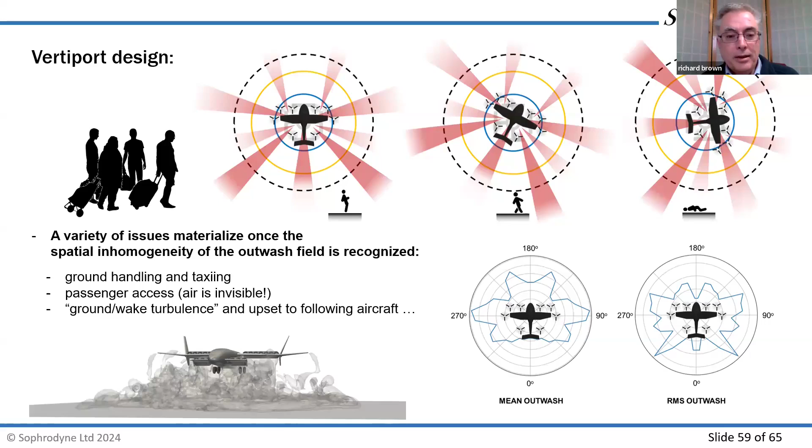Now, I think when we go forward and actually understand the outwash characteristics of these aircraft in proper detail, we'll realize that this fairly ad hoc approach is not particularly well informed and perhaps not appropriate. We need to use the physics to define just where we measure the outwash characteristics of these aircraft. So I think as far as OEMs and regulators are concerned, there's a danger here that we follow the letter but not the spirit of the procedures.

So we take an aircraft, go through the standard procedure, and quantify or qualify the aircraft based on a standard procedure. The salient features of the field are going to be missed if we do something like that, and we'll probably underestimate outwash velocities, particularly if the sampling regime is not dense enough on the ground around the aircraft when we try to quantify the outwash features of the aircraft itself.

One thing we need to take into account is that a lot of our current experience, especially in analyzing the human effect of the outwash field, is based on physiological effects derived in the context of fit, strong individuals. For example, the PAXman model is really based on US Marines, tough, burly guys carrying huge backpacks, and how the outwash created by large military helicopters influences those particular individuals.

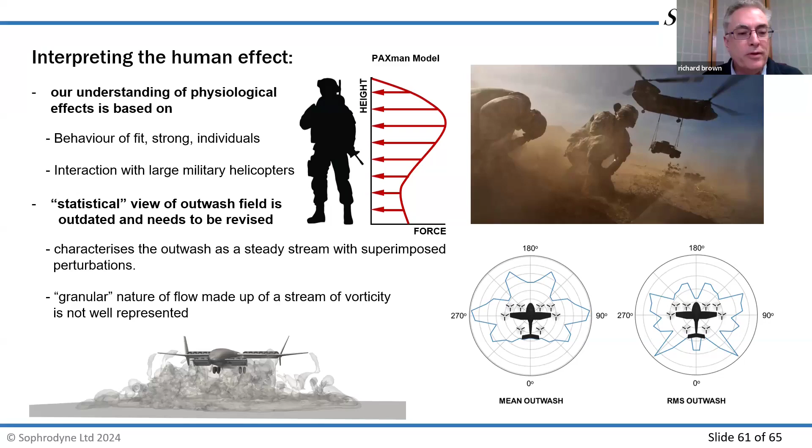Most of our customers for these vehicles are not going to be burly US Marines carrying 80-kilogram backpacks. They're going to be grannies and children. As a result, we perhaps need to change our emphasis in modeling the environmental impact of these vehicles, to properly take into account the physiological characteristics of the most vulnerable likely passengers, in terms of their response to fields that may be very different in character to those created by the helicopters we're more comfortable with.

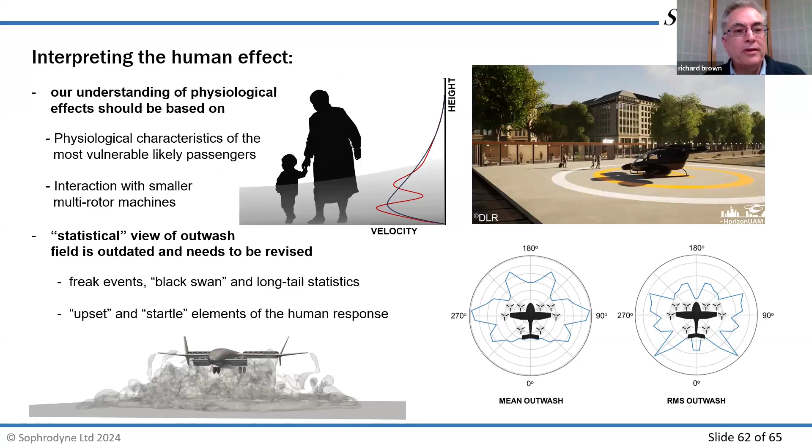So in summary, and this is my last slide, there's definitely evidence to suggest the outwash will be a more serious problem for eVTOL aircraft than it is for helicopters. We can learn a lot from past experience, but within the community you often come across the idea that eVTOL aircraft are just helicopters in a different guise. That's not entirely true. There's a lot of additional information and science we can bring to analyze the outwash problem. eVTOL aircraft have their own specific issues.

I think prevention is better than cure, that we should seek heuristics and general principles we can apply to the design of vehicles at their earliest possible stages. Can we bake in good design principles early enough in the development process so that when it comes to certification it's a walk in the park, because we actually understand the physics and we've designed that physics into the aircraft from first principles? For the flight testing and certification community, these are going to become more pressing issues for the eVTOL community.

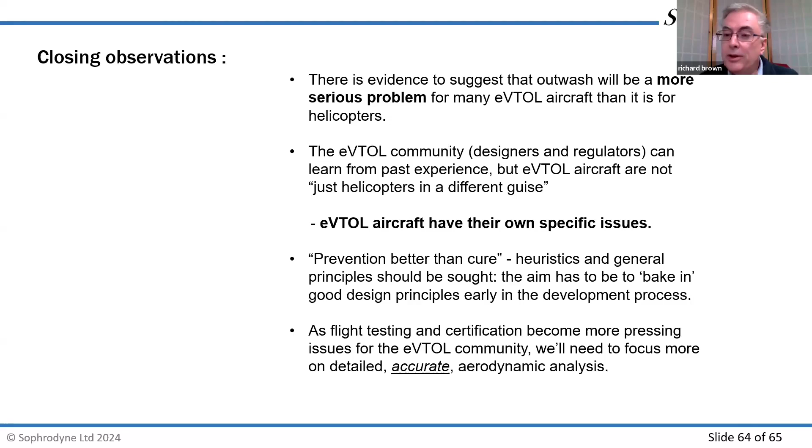When we do that, numerical analysis will have a big role to play, because if we can do proper detailed aerodynamic analysis right from the get-go, we can help in that certification procedure and make aircraft such as this a lot safer than they might be in the absence of that deep physical understanding. So really, it's been a very quick canter through the work we've done.